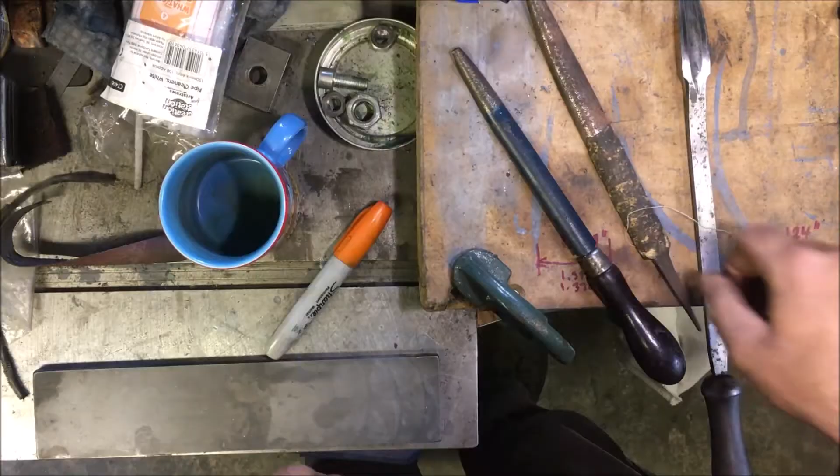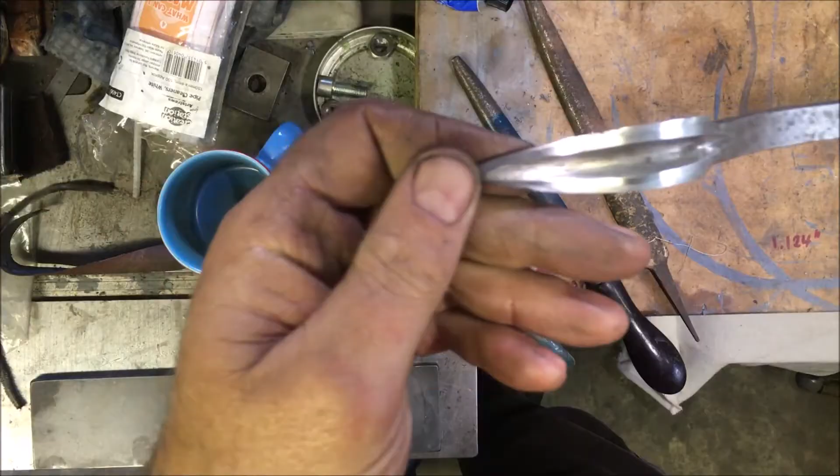I'm just getting sorted for scraping the bearings on the headstock. I actually cleaned up a load of Chris's scrapers and sharpened them up, but they've all gone back to him. That's one I picked up in a car boot sale, I think. It's got some notches out of the end there, so I've got to try and get rid of them.

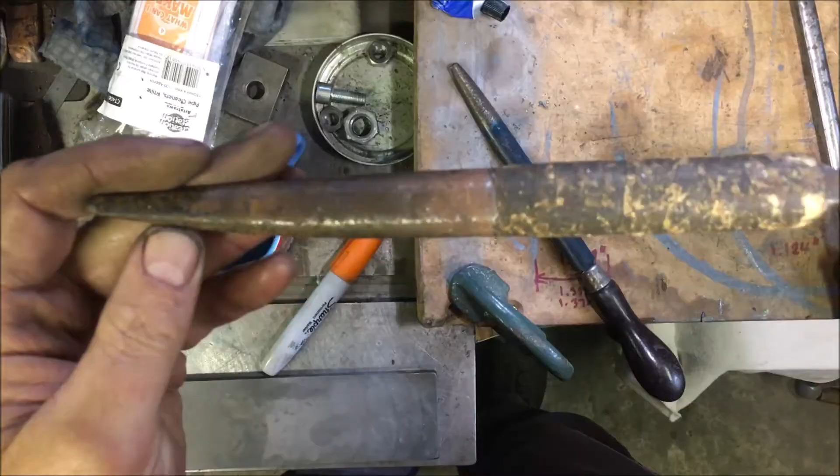That one was from a car booter. That's a homemade, well, they're both made from files. And then that's another one that was an eBay find. It's been pretty crudely ground. It's never had an edge on it looking at it. So I'm going to clean these up best I can and see how we get on.

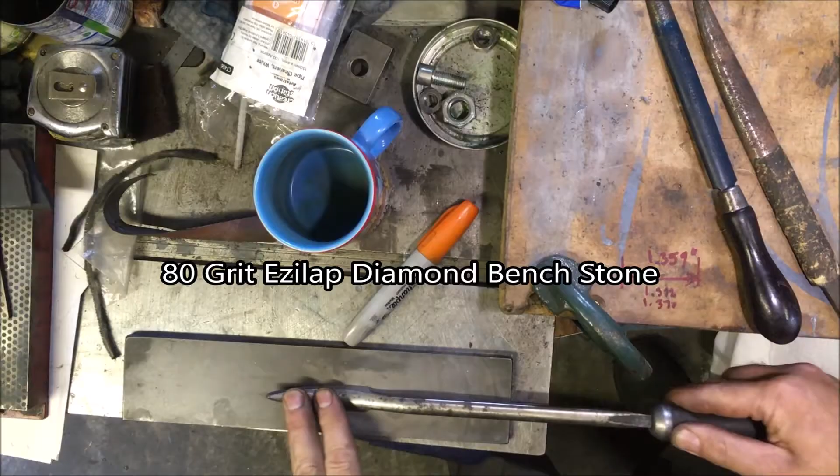Just got to keep working that till it gets to the edge and gets rid of them nicks. I'll put a clamp on. Well, that's took the notches out of that. I've done a 3000 grit on the bottom. Oh yeah, cut my finger.

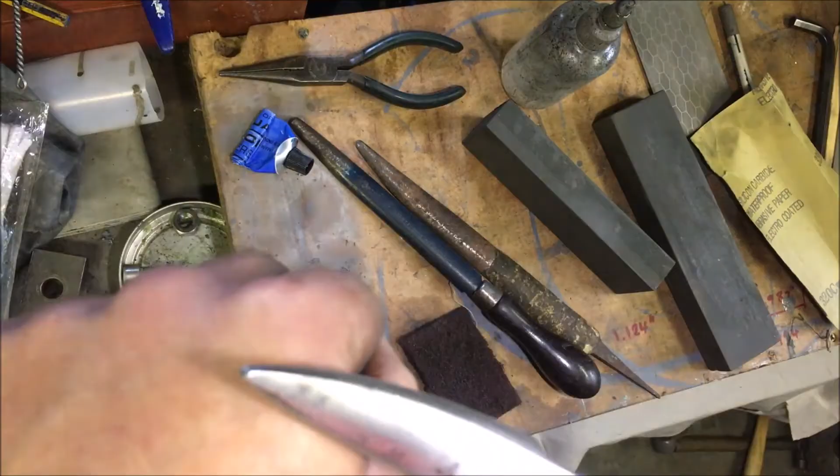And I haven't got a diamond hone that will work around that edge easily, so I've used an ultra fine carborundum stone. No idea on the cutting angles yet, so it's going to be a case of suck it and see. So yeah, feels sharp. Not going to do the hairs on the hand yet though. No. Right.

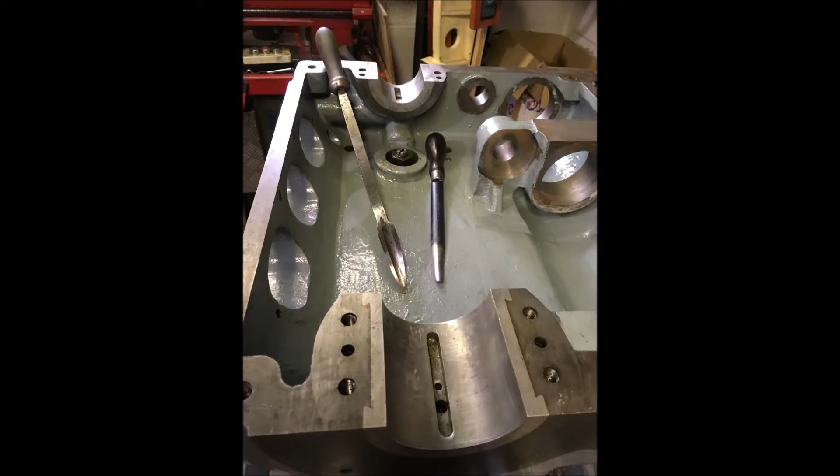Well, I've just gone over and cleaned off any marks on it and the debris, so I've got to put a thin film of bluing on it. I'm using my finger on the basis if I can't do it with a roller, and I've only got to do it a few times, I think. I'm wondering whether a cloth wrapped round it with bluing on it might work, so I might try that in a bit.

I have read God knows how many pages of threads on cleaning up and dressing basically new journals. Very little about cleaning up and re-scraping old journals, sorry, bearings. Much of the stuff has been related to much bigger Babbitt bearings in the region of sort of 18 and 20 inch diameter shafts or upwards, and most of them at that sort of size are spinning turbines and the like, so they're several thousand RPM.

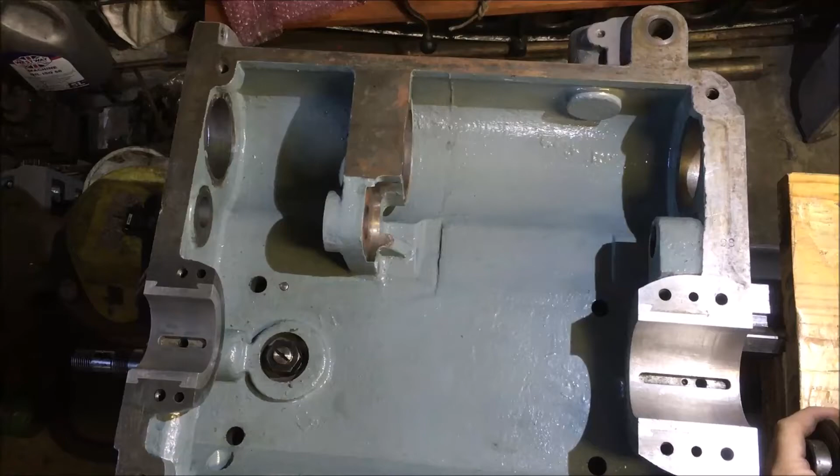Right, I'm going to lift this up and print it. Right, if I don't wallop the camera with my head, that should be a reasonable view. I have cleaned these out. Yeah. Now what they're talking about is a sort of 45-degree rub to avoid a false print putting too much ink down.

Now I'm using the thrust bearing to set the distance, because that's ultimately how it'll be, because I know that the journals are not perfectly round. There's a degree of taper, I think it's on the front one, not huge.

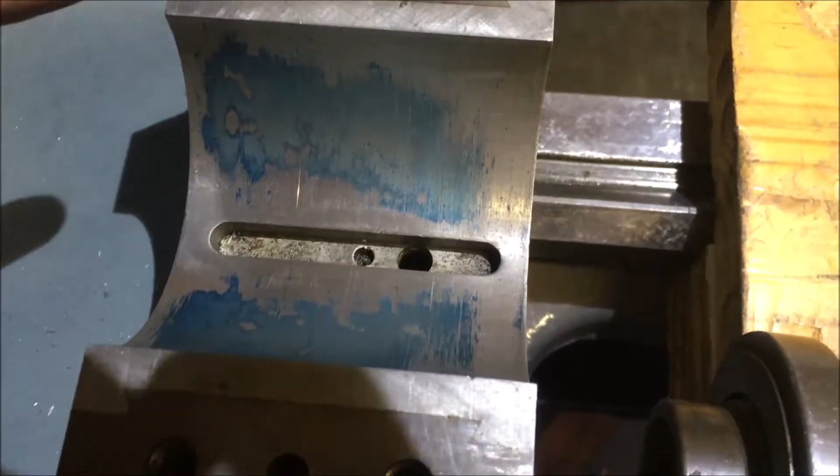So, I don't know whether you can see that. Bring you down. If we take the front one, I can see some contamination there. Scrape. Same at the back there. That's not so bad.

Now, so these are the wick holes, and from what I've read, the gap either side of that wick hole is basically tapered into it so that it doesn't shear the oil off. It encourages the oil to pick up. So I'm not expecting to see much of a print across there, but you can tell there's no print around the edge there, and nothing around the edge there. And then that's pretty much duplicated on the back.

So what I'm going to be trying to do, and I'll get my marker pen and I'll mark around the area, I'm going to try and scrape it for contact, and I'll bring you back.

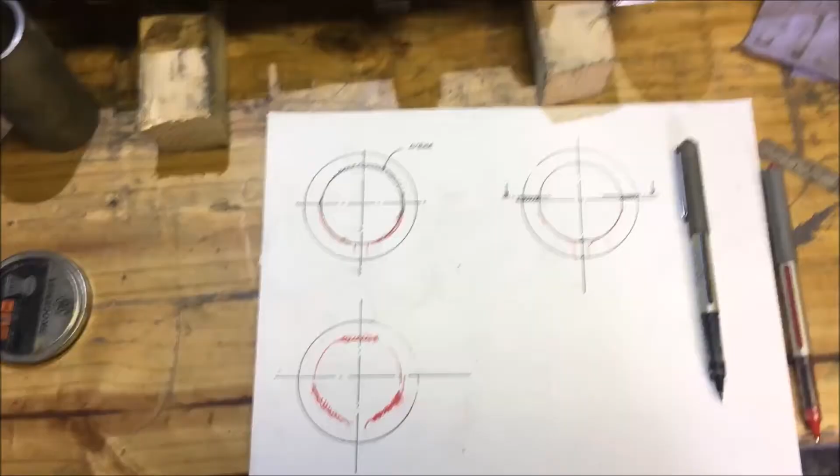Right, you have to excuse the crappy drawings. What we've got at the moment is something in the region of this. So we've got contact in this region and this region. And on the top half we've got a lot of wear, basically at that angle. If this is the front of the lathe, that's working against tool pressure, so it's as you'd expect. So that's the top half of the bearing.

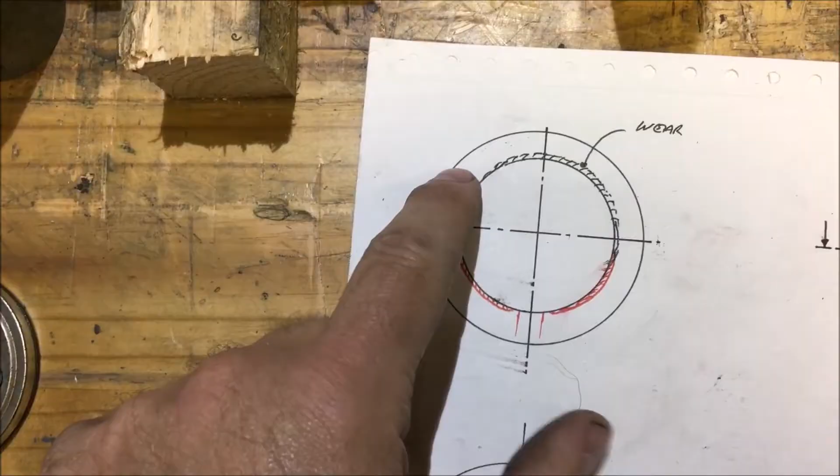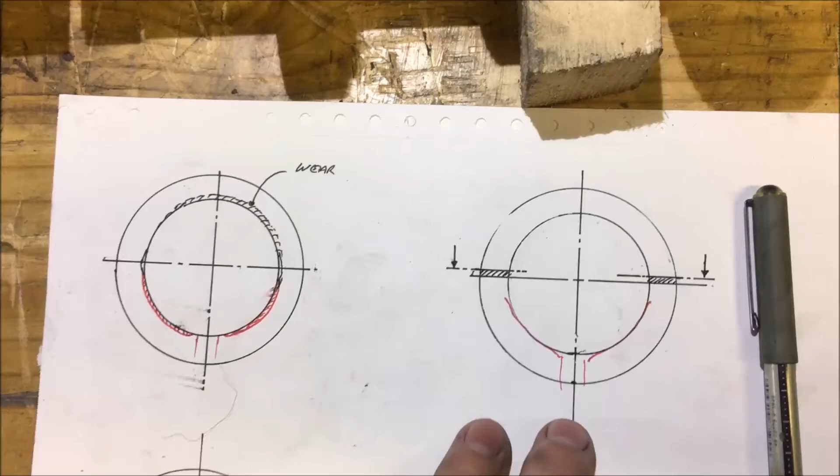Now when the bearing cap is sat on, I don't get a print, so I know that there's excessive wear there. So the job to do is basically to remove material from the underside of the cap. Having measured what it is, that's what you take off, and then you scrape it to give you your contact and your clearance. And that's where you would put the shims. I'm not decided yet on the shims, but I've got to get the bottom half so I'm happy with it, which, as I said, is basically getting some contact area around here.

Because of the way the oil's fed, as you can imagine, if the wick's here and it's running that way, it's picking up oil here and transferring it up and out. What I don't want is the oil just pissing out either end. So what I believe I'm supposed to be doing is, on these sections where you can see there's no contact, I've got to drop the rest so that these areas then become good contact.

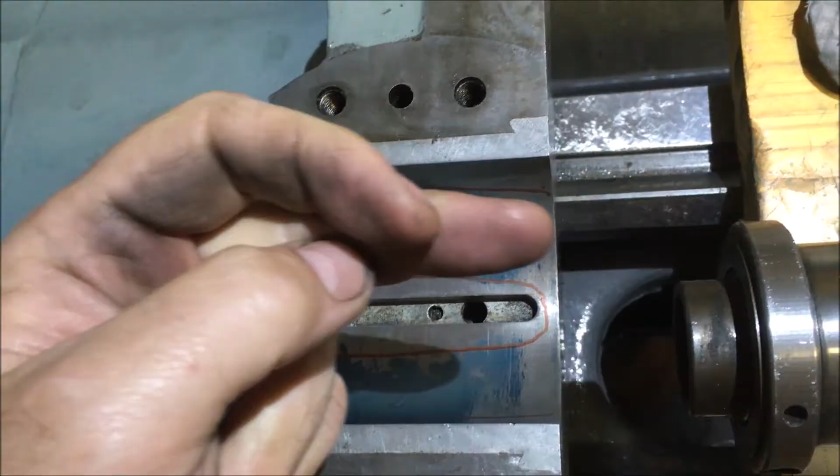That way the oil's got to squeeze past it before it leaks out, so you have the lubricating effect, as opposed to at the moment it's basically worn, so it's a nice squirt line. So I should imagine that's very well lubricated.

So that's the first job, get those knocked back so that I've got a print that goes from edge to edge. In terms of the zone inside the red, I'm not going to bother scraping until it starts bluing up, but ultimately I need to have a taper from the wick out and in, and then also on these lines here, because if I end up shimming it, I'd have to take that area in, so again the raw edge of the top half doesn't act as a shear to break the oil film.

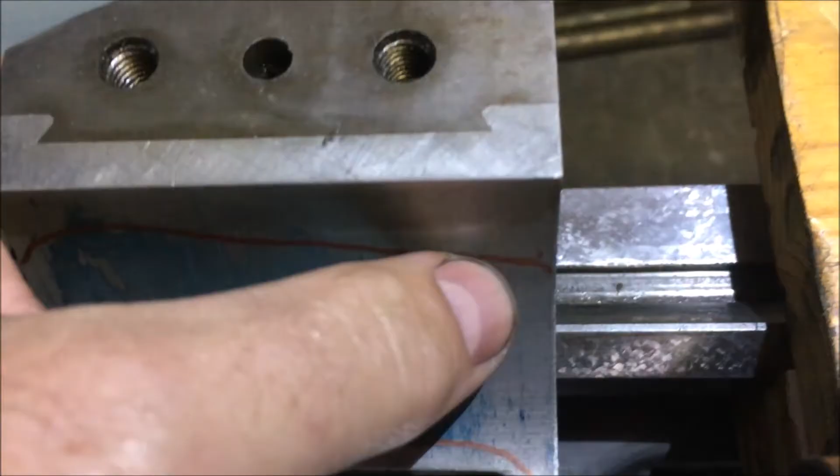Now if I run my finger over that, I can actually feel, and you can just see a witness, so that has already been tapered in. It's not as pronounced on the inside, and it's the same on that one. There's a noticeable, not ledge as such, but witness. Now that's where the spindle runs, and it could be wear, I don't know. I'm not experienced, so I can't base it on experience. But anyway, bring you back in a bit.

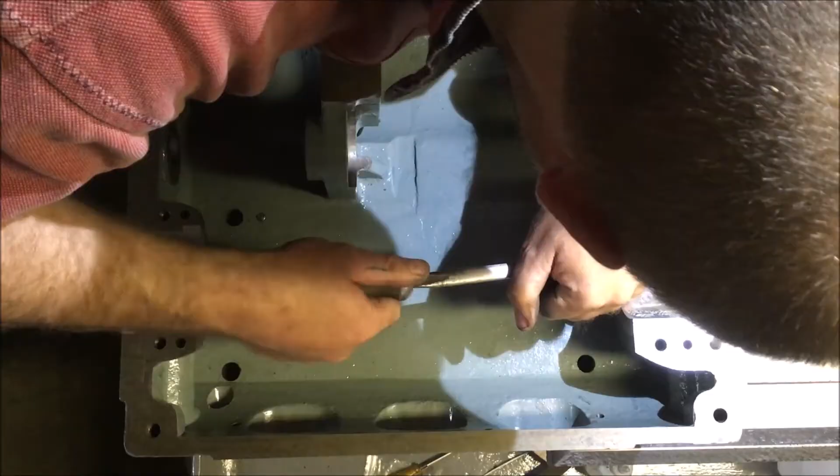And I'm using the bottom as the cutting face. When I've ground or sharpened it, I've straightened up the edges and it's still digging in, so I think it needs a negative rake to cut it and not dig in.

Interestingly, I watched a video on YouTube of I think Indian or Pakistani guys, somewhere out in Asia, and they were scraping quite a big shell, half the size of the whole headstock, but they were doing it with what looked like a piston ring, maybe 1/4 inch across, and they were just scooping it out like that. Yeah, quite impressive. Love watching the films of the way the Asians do stuff. They kind of work on the basis of as long as it works, it doesn't matter how you do it.

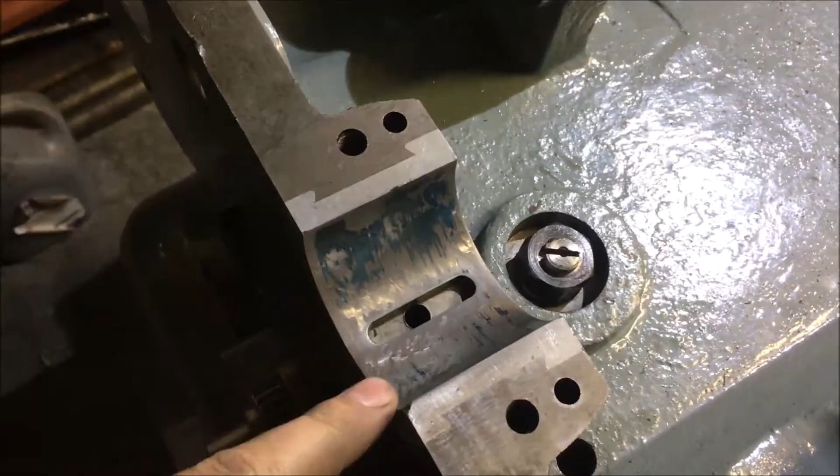I'm actually deburring with this cloth as well as cleaning it off. I'm not doing it with my fingers, I've already tried that. I doubt if I'm taking more than 1/10,000th of an inch in a scrape, which is fine. Like I say, slow and steady. I'm just going to respread the ink. Sorry for my bumps. So that's mainly printing on that side now. We'll bring you back when I've made some progress.

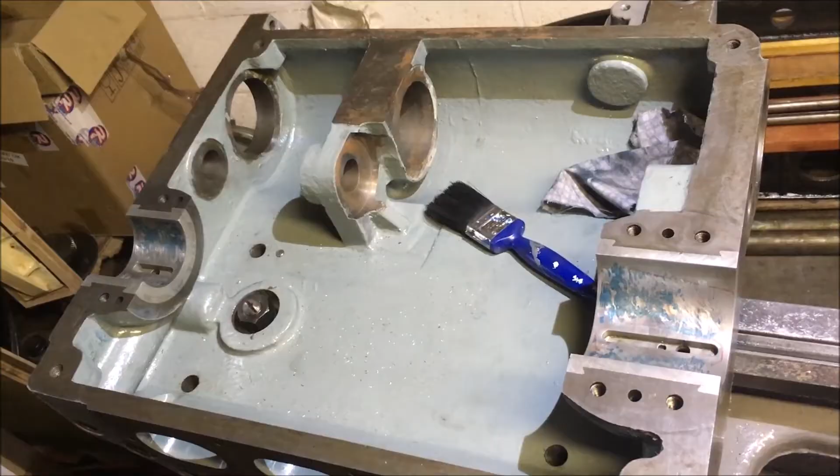Well, I've had various interruptions, but over 3 hours, this is the progress we're at. Still going for alignment, and I am now 0.03 millimeters high, and 0.03 millimeters forwards. That's I think 1.1 thou. So what I'm doing is I'm leaving the back end and just dropping this front down, and all the time it's bringing the print out, and I'm dropping this side as a majority. I'm leaving this at the moment and just taking it out of this portion, which is causing the spindle to move back, which is bringing my front-back alignment back in.

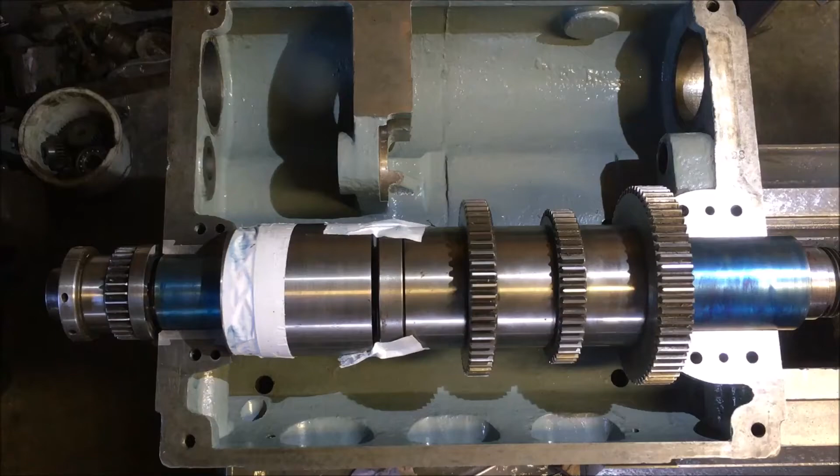The last measurement I did, we are now 6/10 forward and 4/10 high. So we're in shouting distance now. So I'm now going to start, after this, concentrating on getting bearing now, and keep monitoring it every third cycle.

I'll bring you down so you can see a bit more detail. So the back one I've done nothing with, which is why it's pivoted on the back. So I'm expecting, as I bring the back bearing in, the height will raise. So I want to get it down to sort of midway in the tolerance. So that would be, instead of 0.015 mil, I'll aim for something like 0.01.

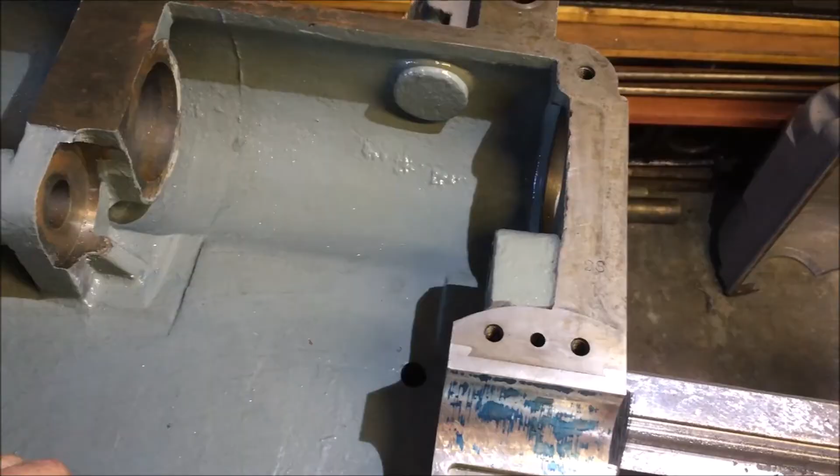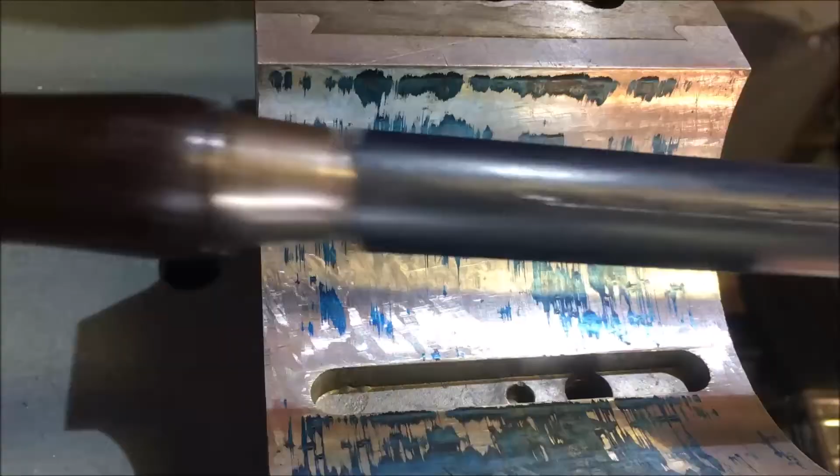The front, all I've been doing is taking away this side to basically shift it over and drop it down. So there's a lot of work to be done to get the bearing right, but alignment first, bearing second. So I'll try and set you up so you get a view and see the actual scraping I'm doing. I've taken to using this shorter scraper because I can control it a bit easier.

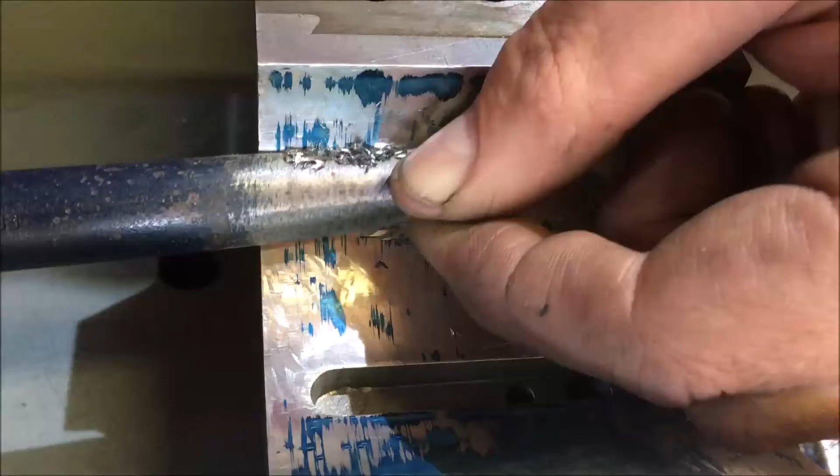And it's, whilst it's a soft material, trying to do it without getting a burr. Remember, you don't want to be using a stone on it to remove any burrs, because you'll end up leaving fragments of stone in there.

You've got a better view than me because I'm trying to look past the camera.

And then I'll just work along this bottom edge a little bit, help it drop down. There you go. That's the following print. So we just carry on now. I'll even that out a little bit more, and then I'll put the spindle in and then run the gauge across and see where we are. I mean, I'm taking off a very small amount each time, so every third measurement it might amount to 3/10 back here, and I've only got sort of 4 or 5 to go at.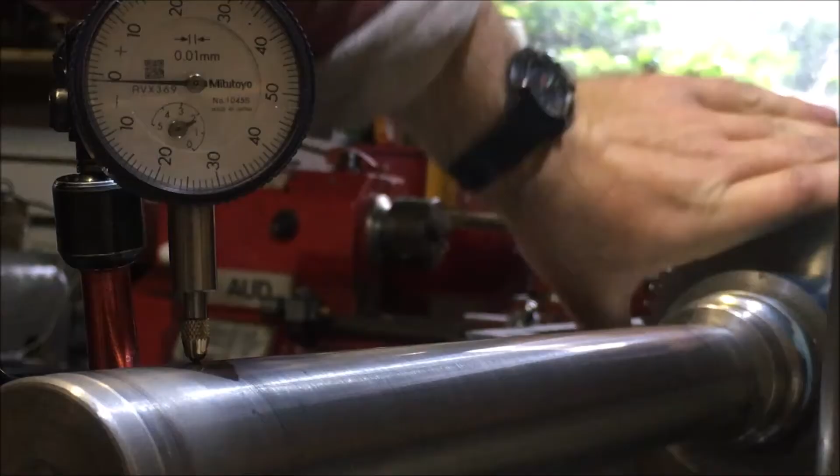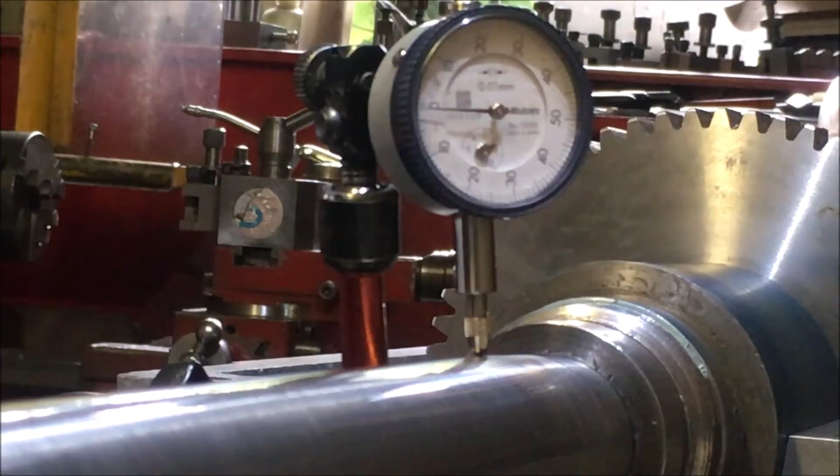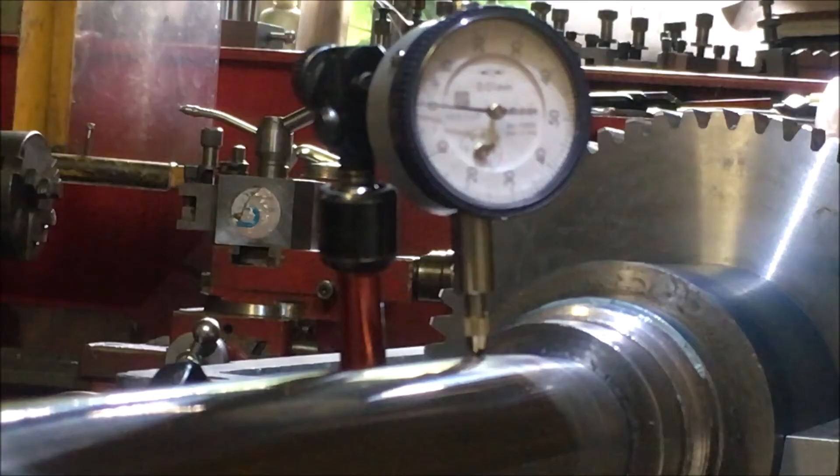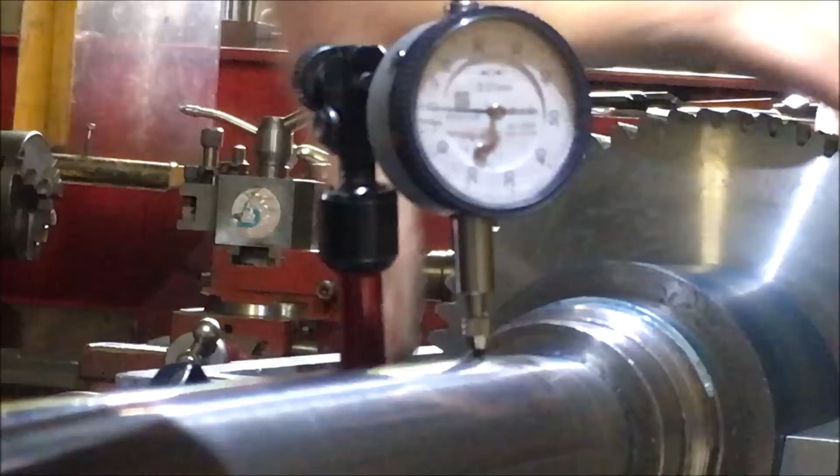And we're checking the vertical alignment again. So that's centered the run out. We'll then slide that down to the other end. I'll zoom in a bit. Not the sharpest of images. But remember, we're looking for this to be 1 division lower than it is. Excuse my bounce. And that's exactly 1 division. So bring that out.

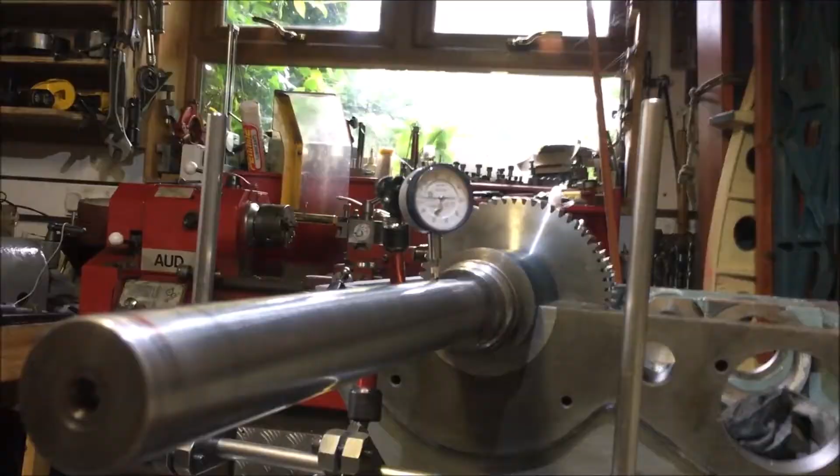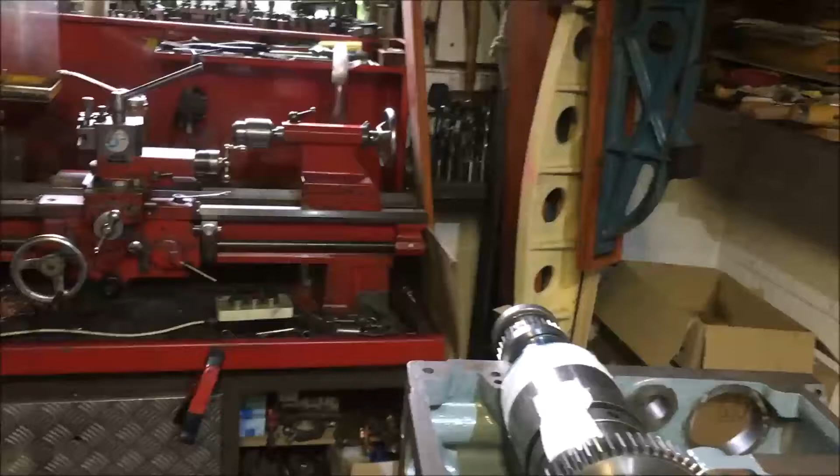So basically, when I spin that round now, you can see it hovering just below, flickering either side of 1 division below. So vertically we're spot on, which means what's key now is any material I take off the bearings has got to be even both ends for it to drop parallel with its current position, as opposed to dropping the back or the front. Next job, spin it all around, check the front. I'll bring you back in a second.

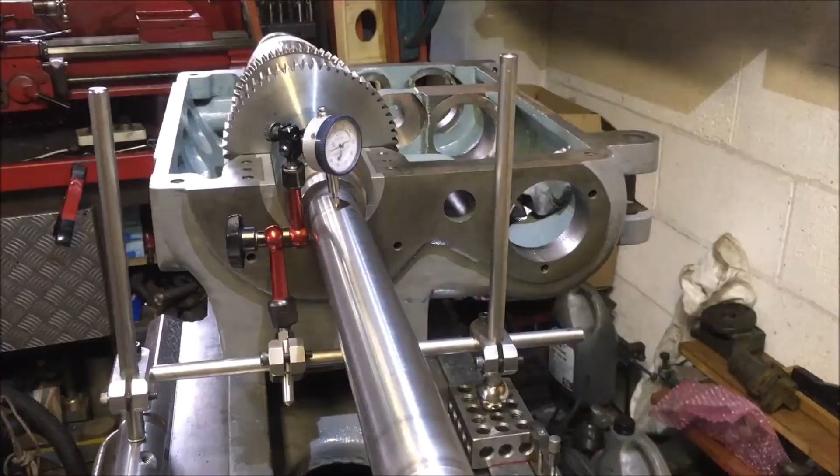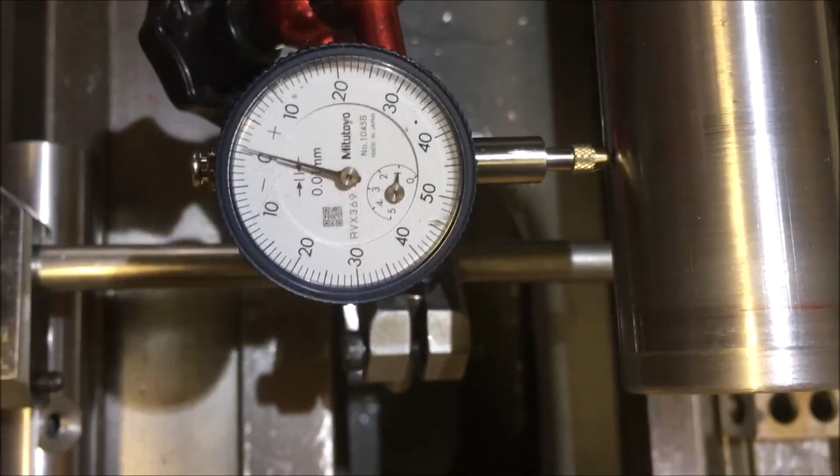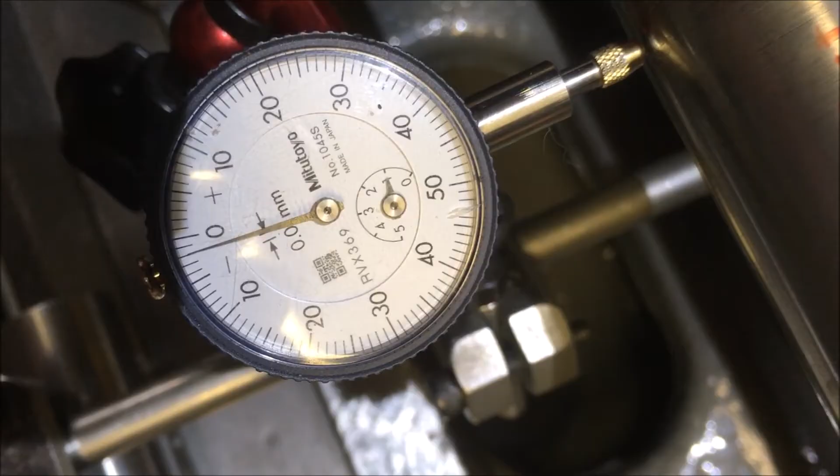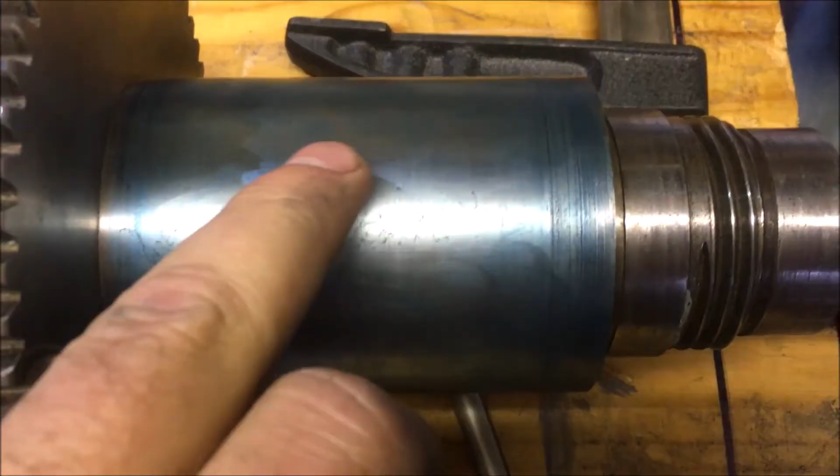Just thought as an indication, that's the ink level I'm putting on. They're in a lot. I sat and watched the video by Muller Nick last night again, where he is scraping in a sort of tapered bearing, for want of a better phrase, from a Myford cylindrical grinder, and he puts it on with a roller, going around to avoid any streaks running like that, which is obviously going to be far more critical on a tapered bearing, where the one cone fits inside another cone. It's like a sleeve.

With this, I'm just swirling it with my finger, so it's perhaps not as even as it could be, but there ain't much on there. There's a little bit more on the tail end because I'm not working on that just at the moment. So I'll stick it in the headstock and do another print. Excuse my bounce. And I'm only doing that kind of rotation.

So that's the face I've just scraped. As I say, I want the front end of the spindle test bar around about 3/10 that way. So you can see the areas where it's in contact. I'll remove those and we won't be far off, I don't think. And the rear one I've barely touched. Alrighty.

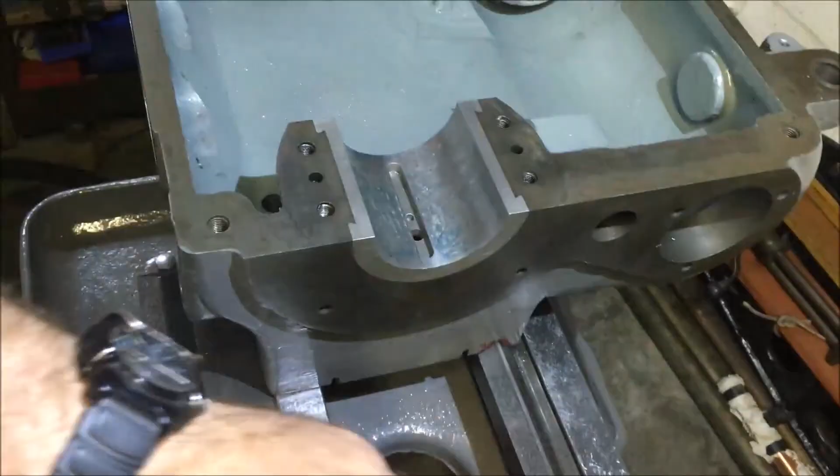That's at about, I think it's 4 hours now. The alignment's absolutely spot on in terms of front to back, up and down. So now I am literally going for points of bearing and trying to do away with some of the sketchy looking scratchings. See, it's fairly hard on this side, so I'm just going to take it down and spread the contact points round.